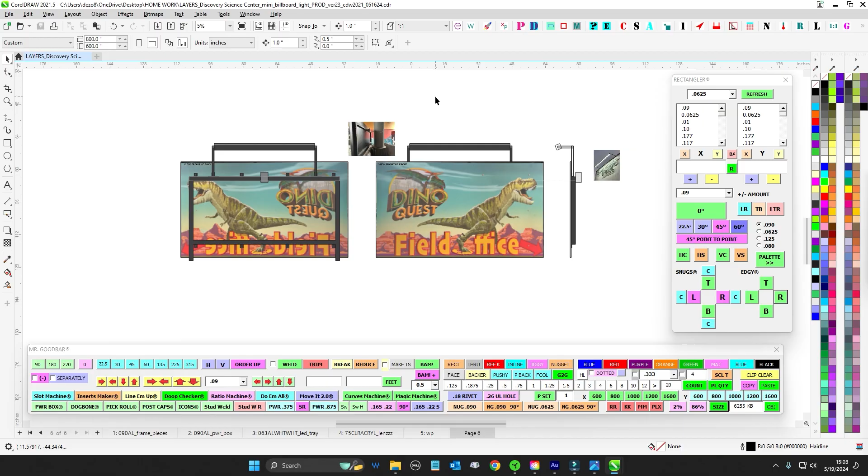Right, got another one here. So this is continuing the Discovery Center Dino Quest. We did the Disco Dino, but they like the light so much that they want us to light up this billboard for them. This billboard's already existing, so I got some pictures here.

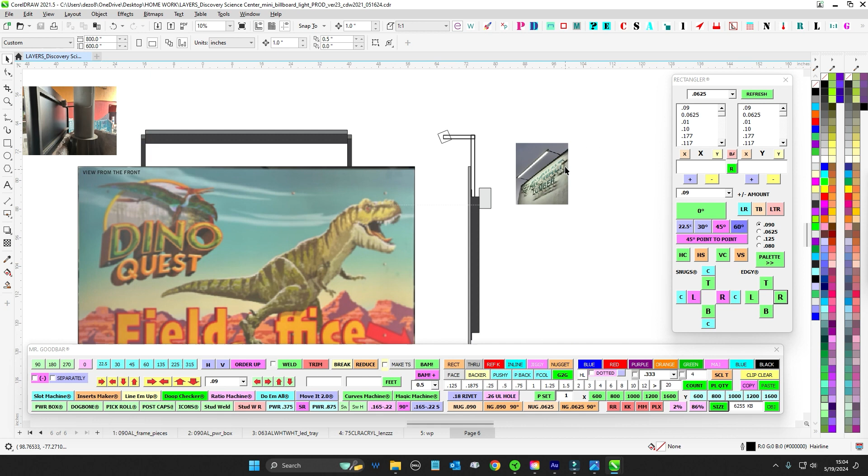So we're just going to be adding this light bar kind of thing. This is sort of the idea, something like that. It's going to come out from behind, so that's going to look like that. So it's going to mount on this bar.

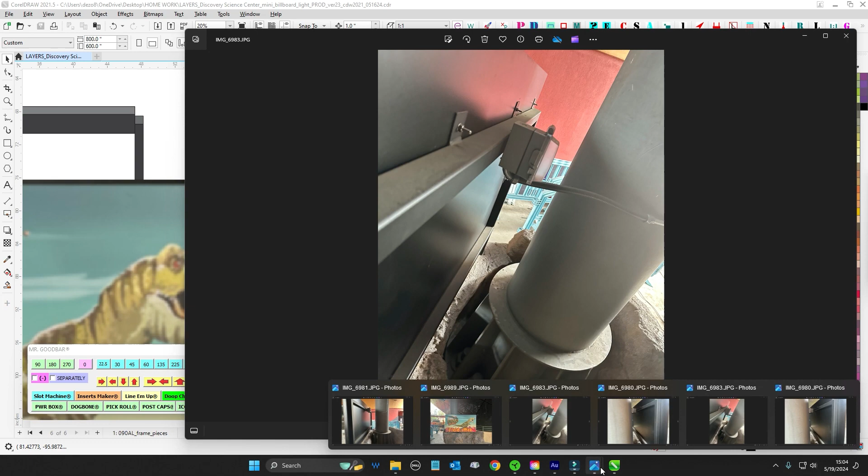This is 2x2 steel, it's got these tabs, so that's all existing. And then it's going to go into this here wet location plug-in socket, so they'll just lift that up and plug in. And then our little unit, the power is actually going to sit right there. So power will sit over here, it's going to mount to this bar and go across, and then it'll be on the other side over here, and that'll be this mount.

But so that looks like this, kind of like this. This view's from the back, so power will be over here.

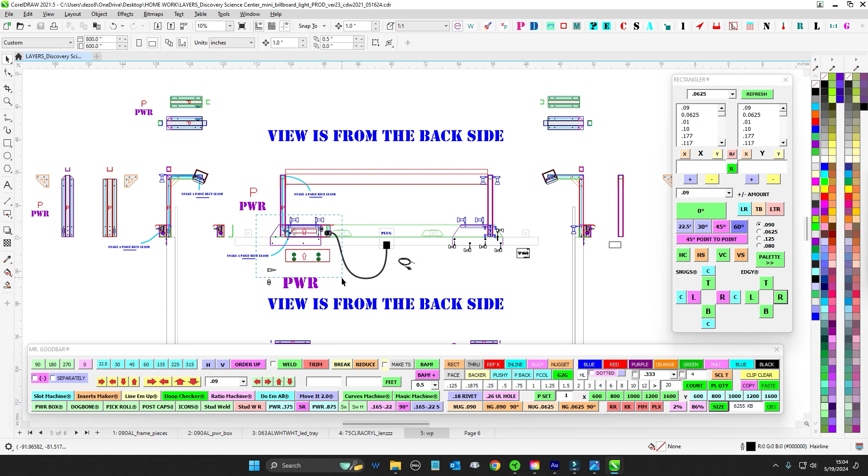We got the light bar right here. This is the existing kind of layout, so you can see those tabs, you can see where the bolts are and stuff like that, and that's where that plug is. So nothing too crazy, but I just want to go over it and show you some things, show you some pitfalls and some challenges. So with that, let's get after it.

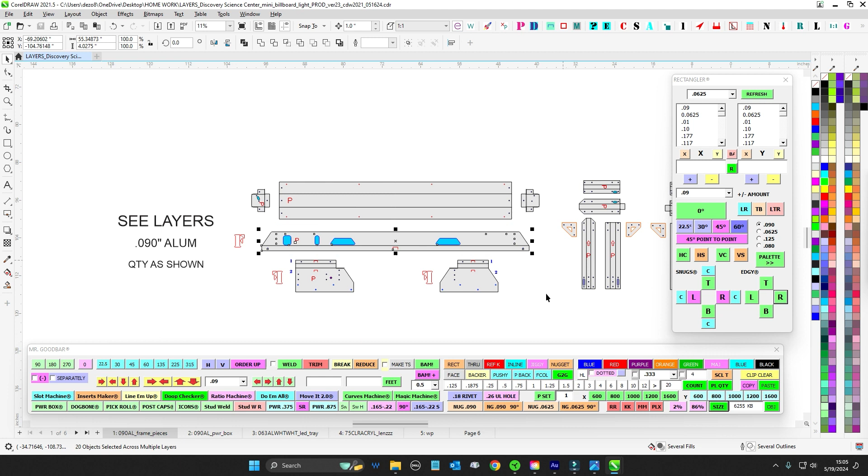Lay of the land: I got the frame pieces, you got the end caps, you got the main light fixture, you got sort of the crossbar on the back to give it strength, and then you got your sort of mount plates there, and then these are the actual light bars.

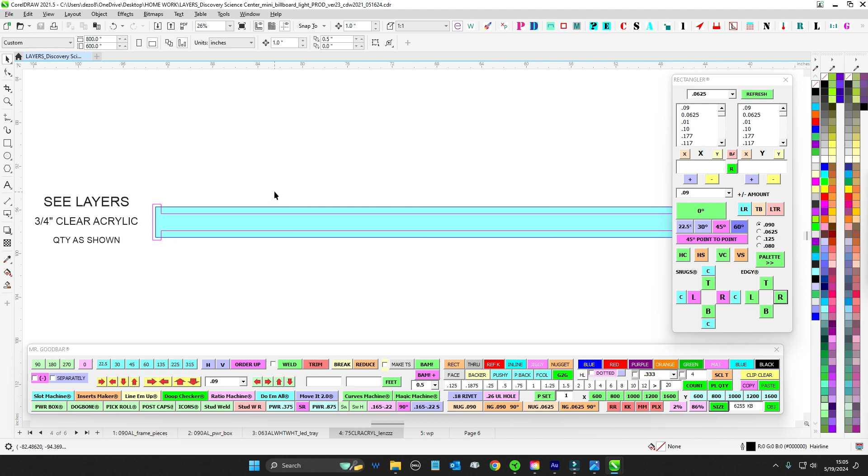So very similar to what you just did, it's just a little bit smaller. And then it's going to be this custom little power box that goes on the back, you're going to rivet together. And then we have just a single little white light tray where you're going to put some LED strips. That's 063 white, and then there's going to be a 3/4 inch clear lens with a 3/8 groove. It's going to hog all this out here, nice island fill, and then that's where the channel will be for the LEDs.

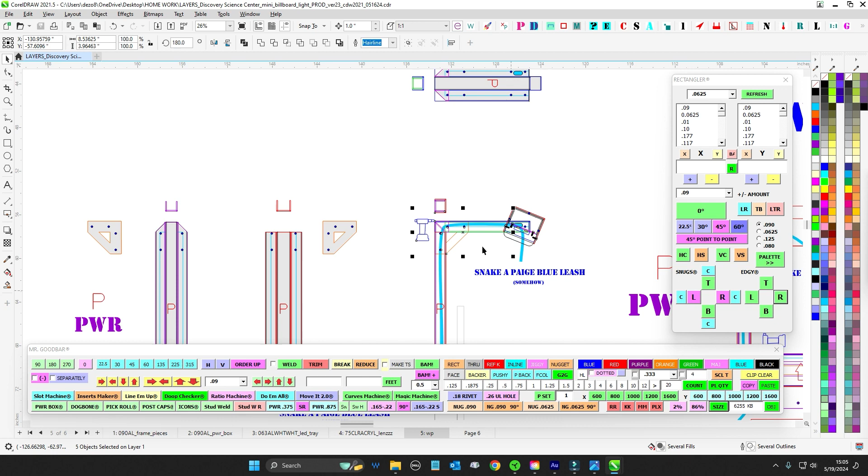So again, it's nothing crazy, you just kind of did this, this should look very familiar to you. So you're going to get these, slide this inside here, slide that inside there, and then use these guys to rivet that together. And then you're going to have two L's.

You're going to have the power side and you're going to have the non-power side. So non-power side has nothing on it, there's no holes or anything. Obviously everything that's power is going to have a P on it, and the P, because I have the power, is all going to be everything on this side.

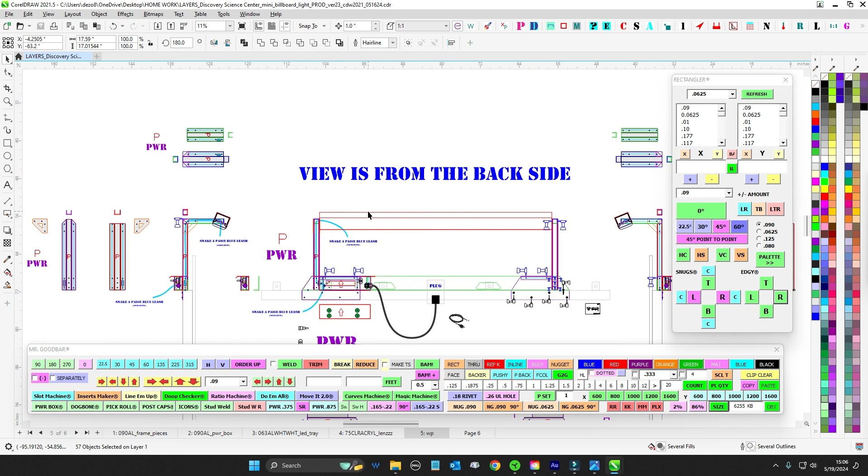So if you're looking at it from the back side, which is this side here, the back side - where's the good shot, that one there - so from this side power, this technically is the left if we're standing back here in the rock. But it's kind of tough for the left and the right, I could have done port, but port was P, so whatever.

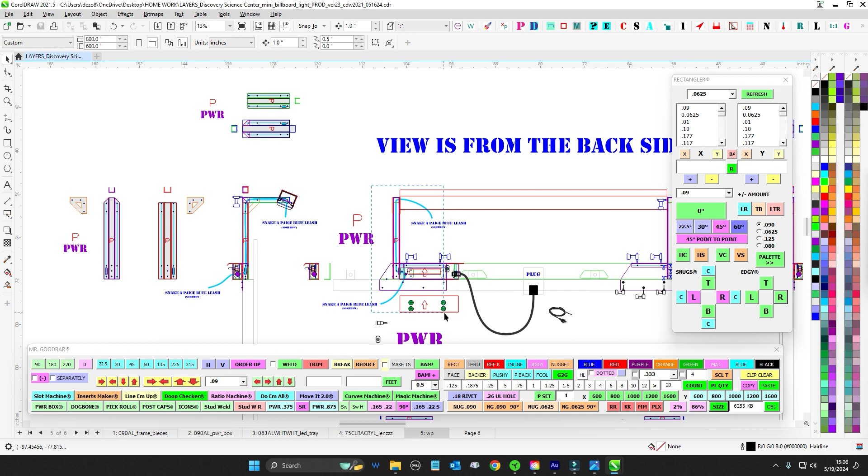So as you're looking at it, everything's on this side, so P's power. This guy here, you're going to flip this over, this is actually upside down. You're going to flip this back this way, and then that plate will kind of be showing this way.

So anyway, everything, there's no welding, there's no welds, it's all riveted together. So you're going to go ahead and rivet together your L's, get those brackets made, get this L put together, good to go.

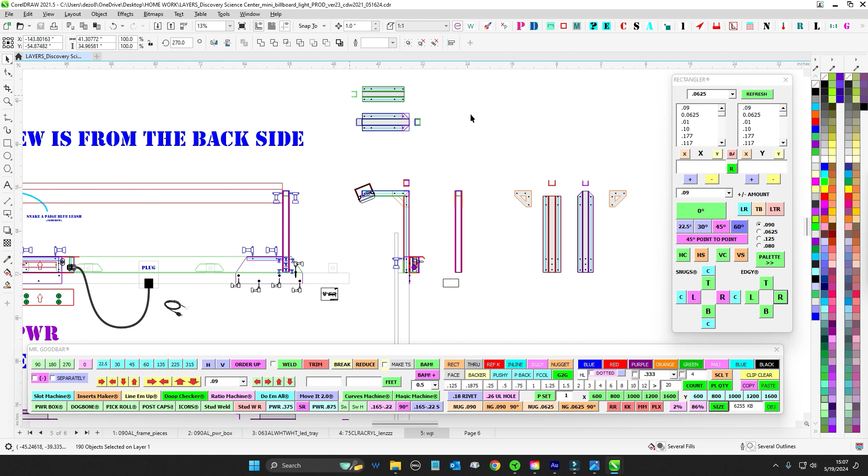Then you're going to go ahead and take these plates here, and you're going to kind of sandwich - this is like this little 1-2 bend. This flange here goes up against this green plate, so if you look at it from the side, you can see where the green plate is in the front sort of, and it faces forward.

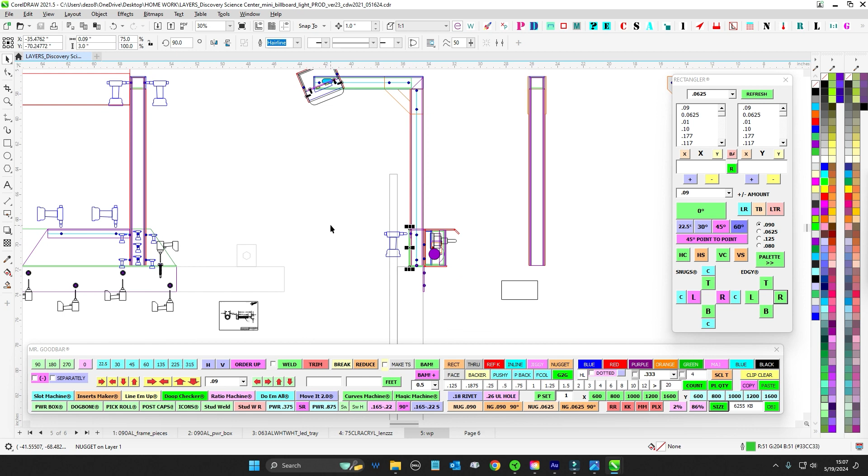The green plate faces forward and then tucks under, closing off the tube. So you slide that down, and then the purple guy here goes this way, and then back. And then that's the mounting plate that goes all the way down.

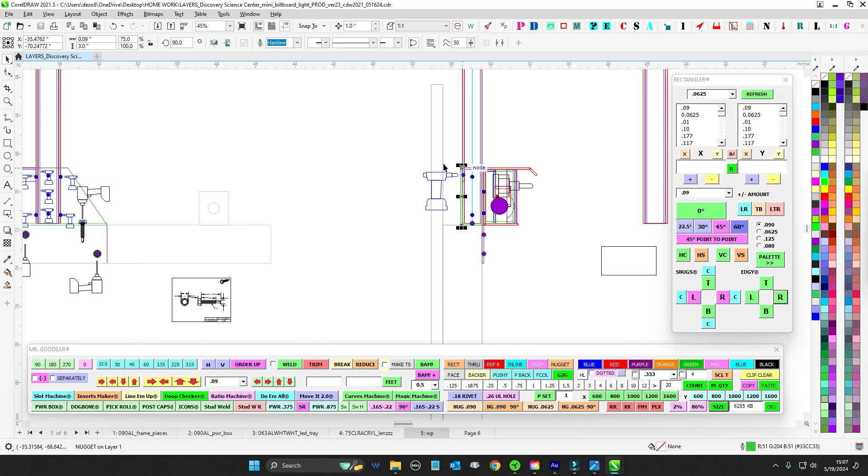So that's like here, that's the mounting plate. But then this part curves up, and you're going to hit that with rivets from the front. And then these here will coincide with these right here.

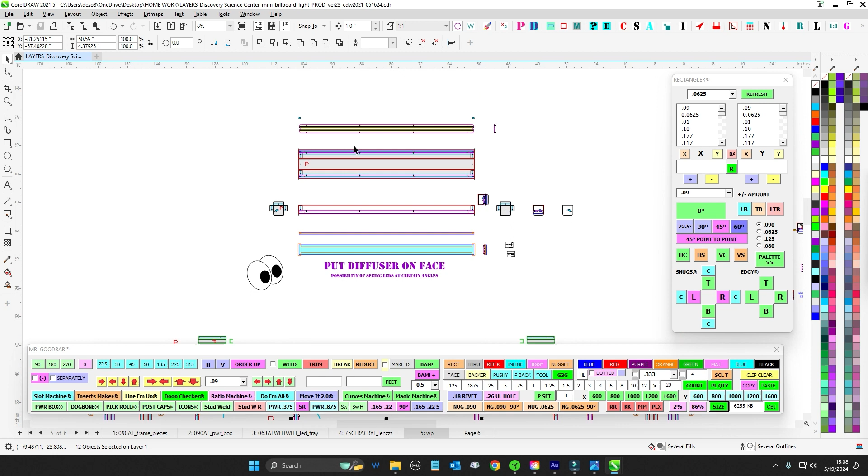So this is your main strength plate that runs across. Originally Jim had this figured out with these two legs, but torsionally, this is 4 feet across and it'll be twisty and bendy because it's just an 090 box. So I went ahead and put the brace along the backside too, so that way this is a nice unit, just a little piece across like that.

So these plates here, you do a 1-2 bend, and then they actually rivet to the front. They're going to rivet 3 rivets here into the L's, right here and here. And then on the front side, you also get these 3 rivet holes here that go into the L's, into the legs. So front and back, that'll create one big sandwich.

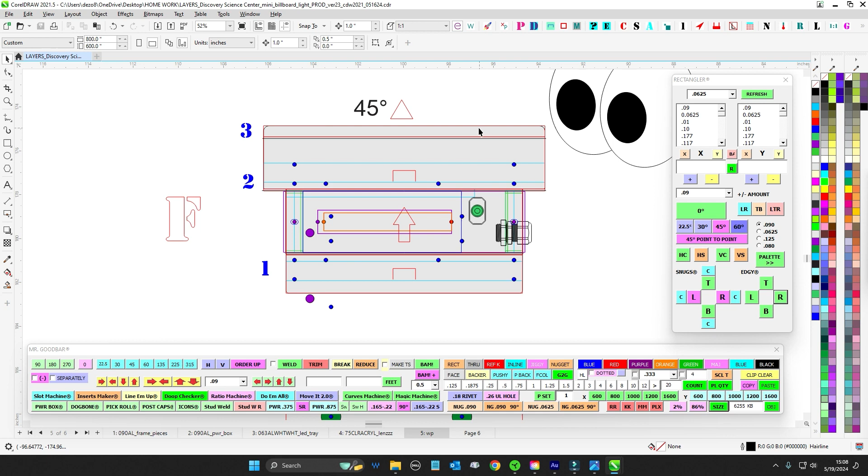So that's how that'll all work. Go ahead and rivet together the power box. The power box is a 1, 2, 3 bend. You're going to bend this, bend this, and then last you're just going to put a 45 lip. There wasn't enough room to put the angle bend there, but you're not going to do full 90 on that, just give it enough so any water spills off.

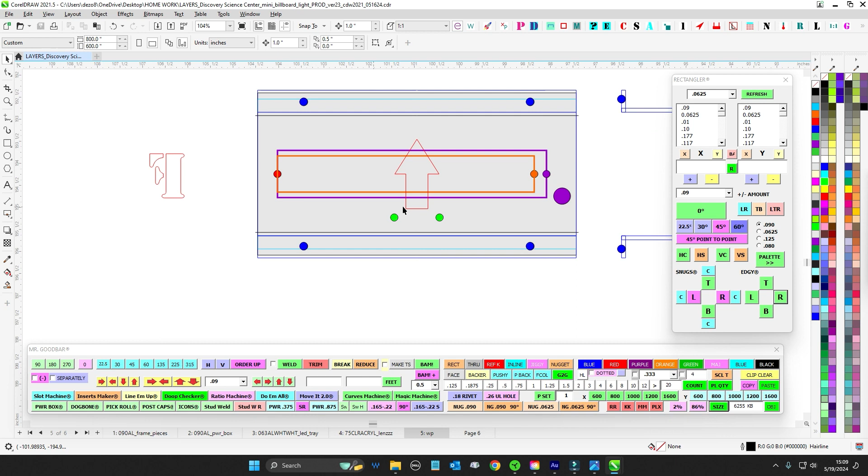And then you have an inside tray where we're going to do keystone, either 24 or 12, whatever you're working with as far as light tape goes. I left that for you, but it's going to be, and you got 2 points here for ground. It's going to be a tight fit.

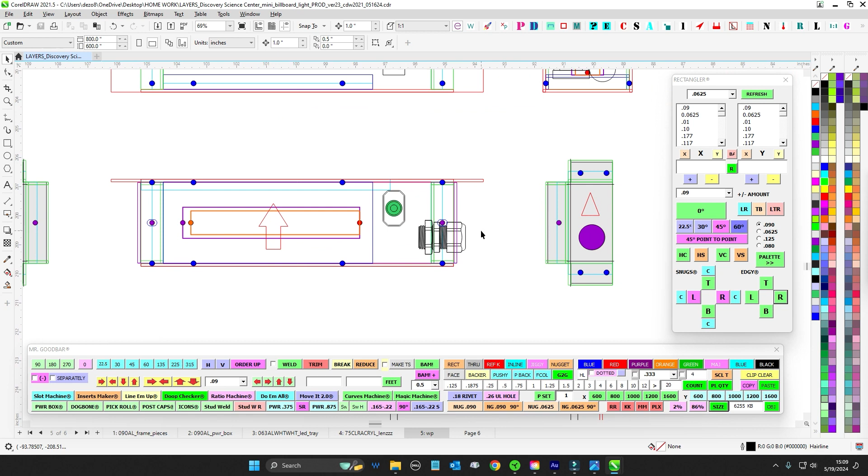And then the switch is going to mount to the door. It's going to poke through and you're going to mount it there. Then this is going to flip around and just mount, like we do. It'll have that there and that there. These guys go flanges out like we do. And then this side will be for a liquid tight connector for cord.

So because this is going to mount and just plug and play, essentially, lift this up. This is a watertight, or wet location, and then the cord's going to come out and run along. I believe Jim said he's going to install this, so we need to make sure it's plug and play, literally.

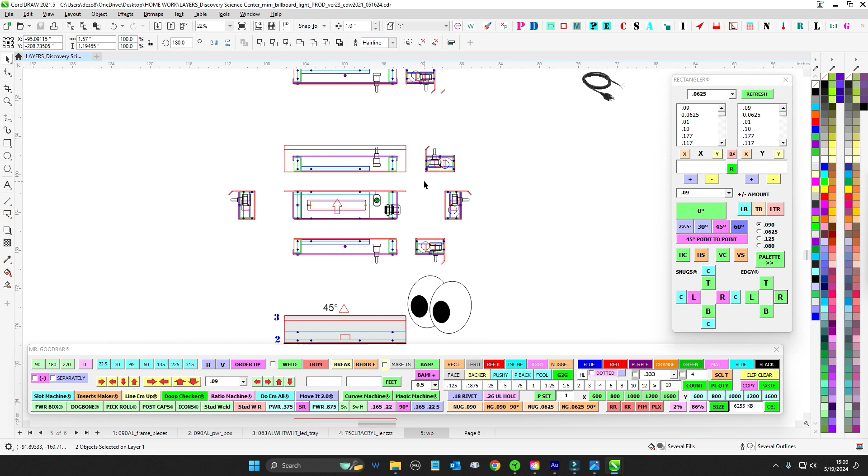So I did order up, I didn't know if you had any plugs, so I ordered up a couple of these from McMaster. These are wet location, I think these are SJO, whatever they are. So you're going to take, and this is coming from McMaster as well, so you're just going to get that in there, do this, get it grounded up nice.

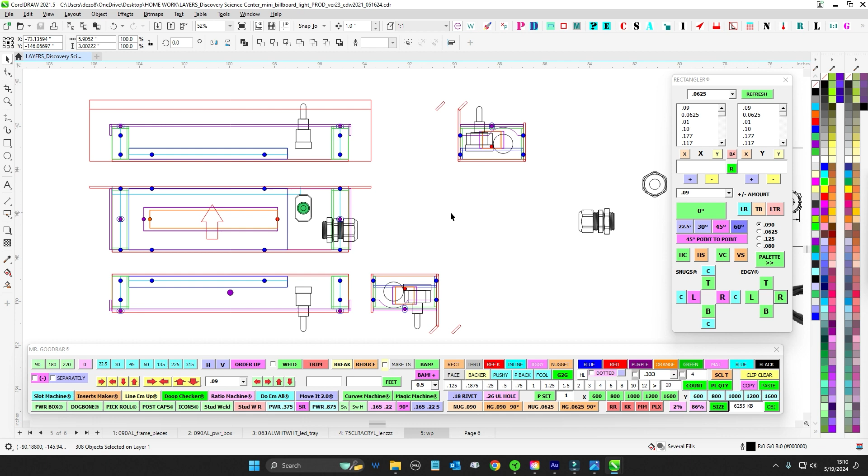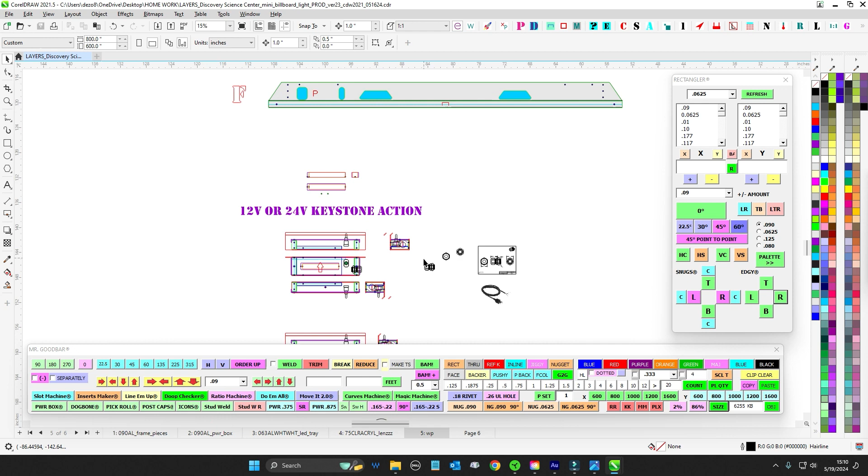And then Jim said that these guys do sort of dot their I's and cross their T's, so they're going to want to do probably UL. So we do want to do like an electric sign label, but if we do a cord connected sign, everybody playing along at home, I believe it's 20 pound for 1 minute. So you're going to want to do a test to make sure strain relief is good to go with this guy, but also this is wet location, so that should be good. And it should do watershed okay with the switch and everything. So anyway, that's that.

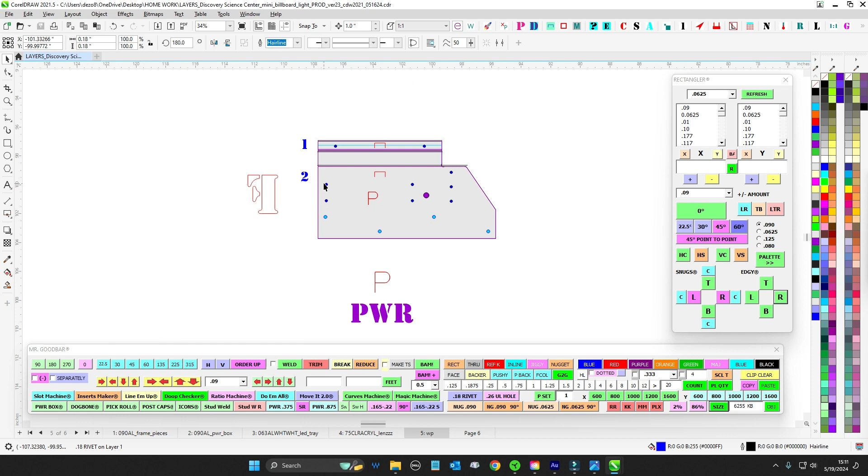So get this built and then go ahead and get these guys riveted together with the L's, but don't do the tray yet. So you can do this part, do the back part, and then you're going to use these access holes from the front to get to these rivet holes here to be able to rivet this whole assembly onto the plate.

So these holes here will be what you use to put this whole system onto the backside plate here. And you can see right here, these are the corresponding access holes to get to those with your rivet gun, through here and here.

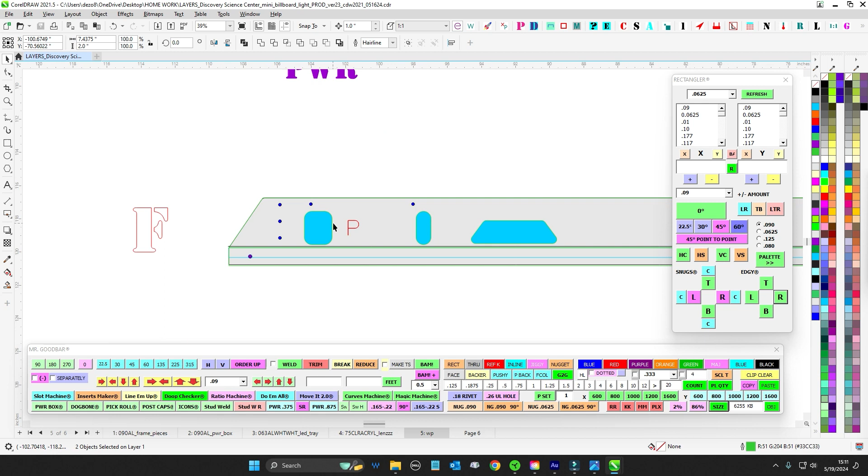So it's a little bit of a threading the needle thing, but when you're done, this should be riveted to the backside of that purple plate, and it should go right along with the curve, the top part there, with the rivet there, this little guy here. So it should be even, it should look pretty sexy. A little box poking out.

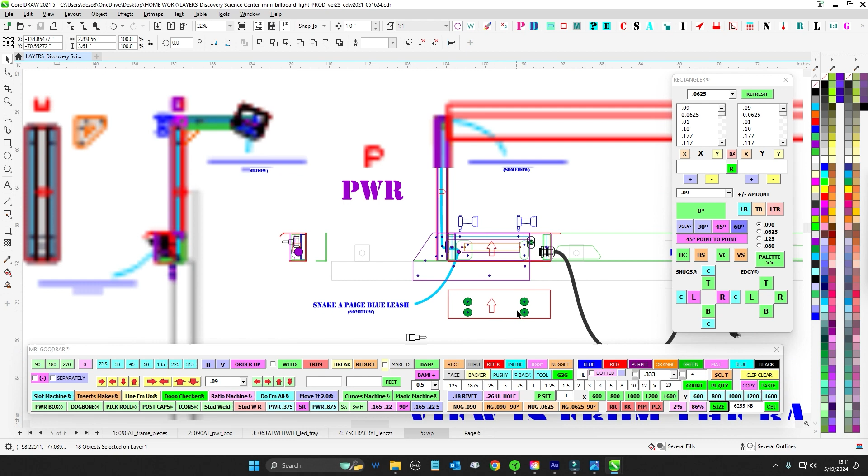Here's your switch, and then this is going to run along to the plug there. So I think you guys get the idea.

4 shots here, 1, 2, 3, 4 self tapper, 1, 2, 3, 4 self tapper. And then I have holes here in the green guy right there. If you want to run, if Jim wants to run a couple verticals just to make sure it's nailed down, they have provision there.

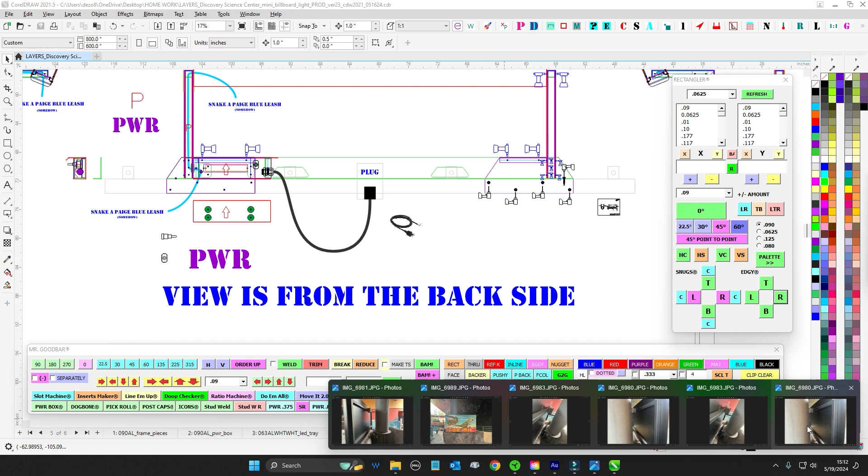So that's kind of where, now that you see what's up, this plate should be right about here. 4 screws, frap, frap, frap, frap. And then it should be 4 screws here, frap, frap, frap.

So now these bolts might come into play. I think they stick out about 1 inch, so hopefully I went ahead and made clearance for those.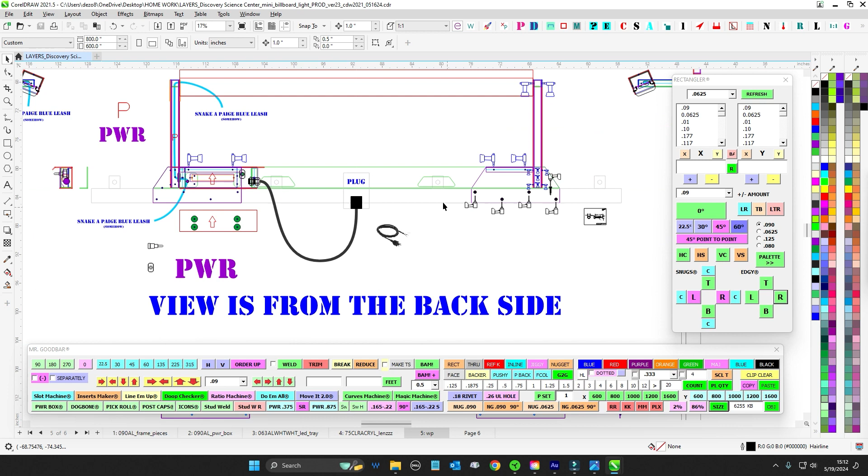They should be right there per Jim's measurements, so that should give us a little bit. It's a nice little detail, looks cool visually, but that should allow if those bolts need to poke through.

Because again, I don't know if Jim's going to have the ability to chop those off, but this whole thing's just over 1 inch. It's 1 inch and 09, so it should still fit in there.

So this is all no fly zone. Hopefully there's no conflict there as it sits on the 2x. So hopefully that works for him.

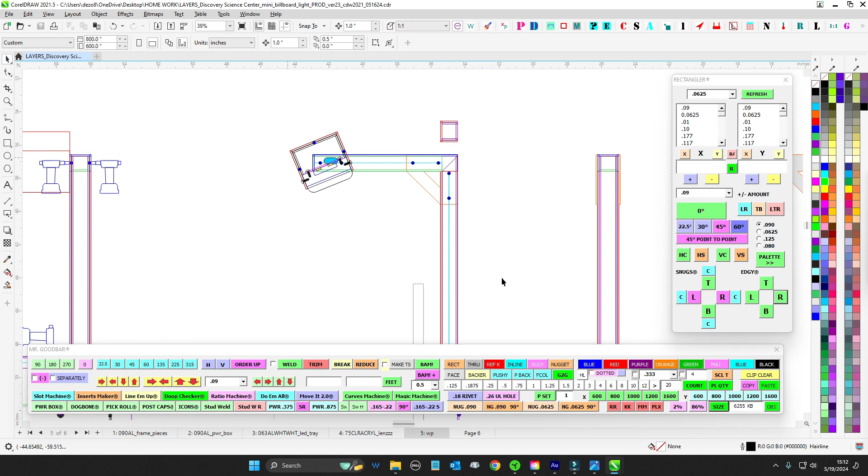So go ahead and get this guy built, get that riveted to the purple, get that riveted together, put the crossbar, get these L's good to go, get everything riveted, but do not do the box yet. So now you can set that aside because I think that whole thing's good to go.

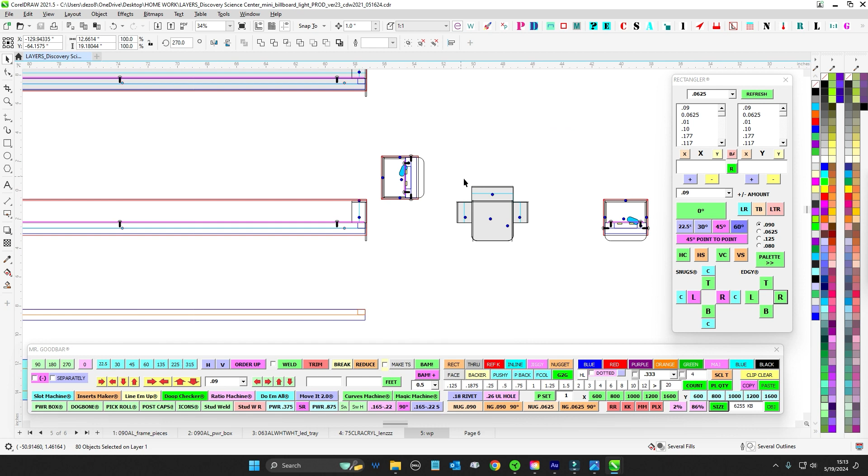Now you're going to bend this up, 1, 2, 1, 2, good to go. And then you're going to do 1, 2, and 2 on the ends. And then the power one has the hole through for a leash. So put the power on the power side, and then you're good to go there.

Now, before you assemble this to the box, you're going to rivet it together, but do not assemble that yet. Let's go ahead and mount the acrylic while it's loose.

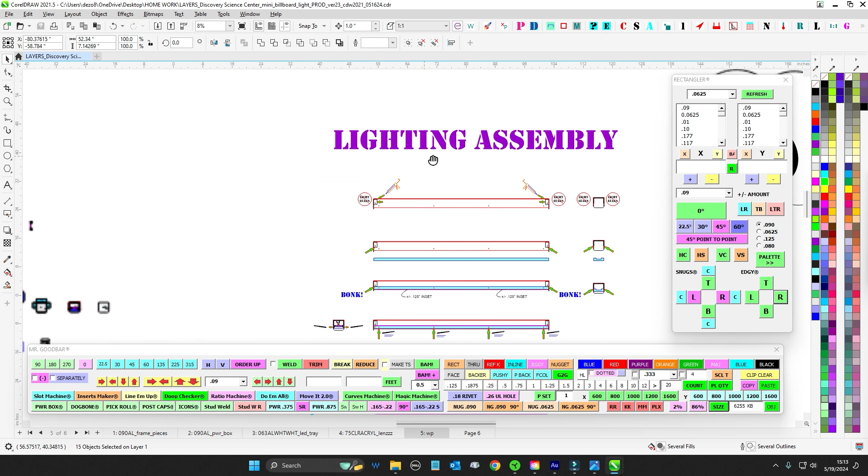So while it's loose, this is the lighting assembly right here. So you've got these riveted in, the caps. Then go ahead and put a little bit of caulk, because we don't want a light leak on the seam over here. So caulk that up pretty, okay.

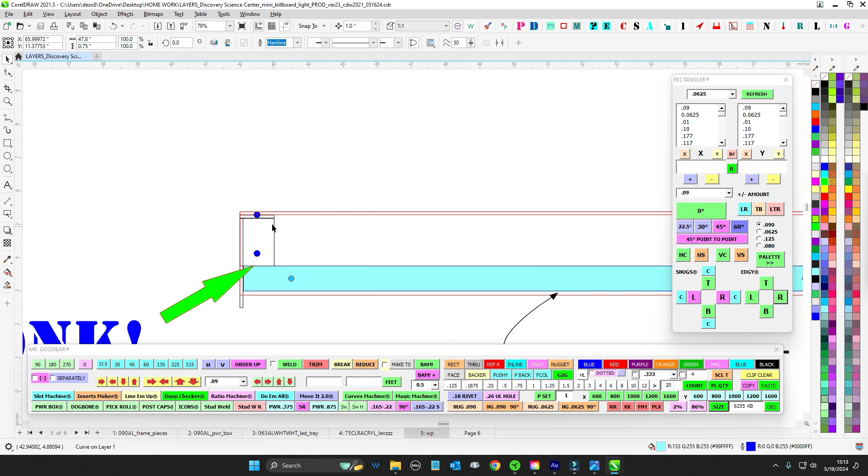But keep this clean, because this now is going to become a landing shelf for your acrylic when you slide it in. So don't get any caulk on that ledge, but try to make sure there's no light leaks coming through here. I'm not sure, because this is all going to get painted.

Hopefully they throw some Bondo on those seams on the side. That would be great, but we'll see.

Anyway, so take your acrylic with nothing on it, and then go ahead and put it in. Make sure that the 3/8 trough for LEDs are facing into the cabinet, into the box.

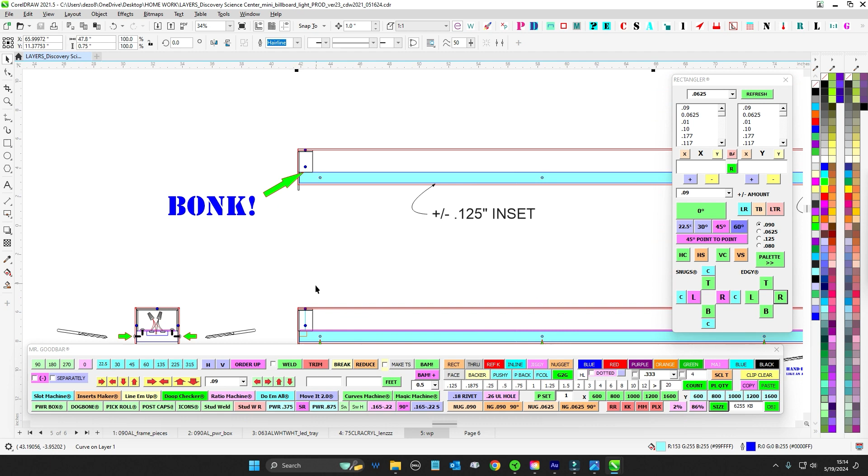And then when you do that and it bonks, because this is metric, you know who I'm talking to. This isn't 3/4, obviously. This is going to be 0.71. So this isn't going to be exact, but it should be about an 1/8 inset.

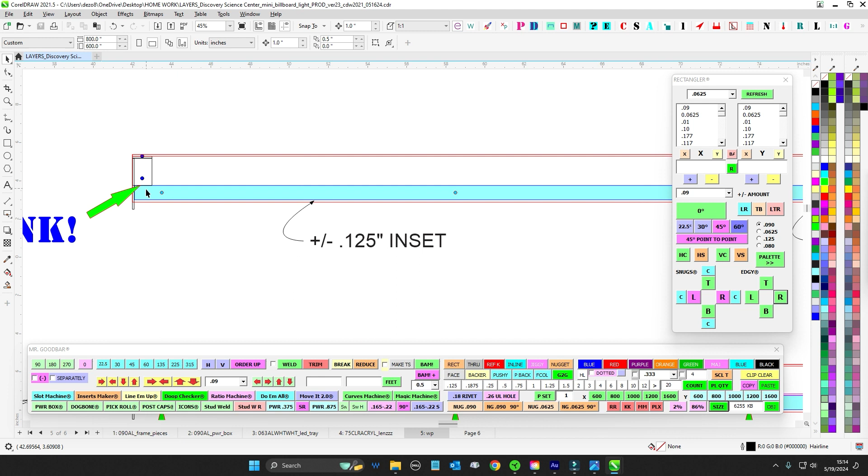So let this bonk, and then whatever you have, just make sure it's not sagging or dipping. And then you're just going to line it all up, and then by hand you're going to drill the holes. So make little marks for yourself, get them started, dimple, and then you can pull it out and drill better.

We're going to use those screws that we like to use. I brought them in. So you're going to have the cord, you're going to have these screws, and you're going to have the strain relief from McMaster. So look for that probably on Tuesday.

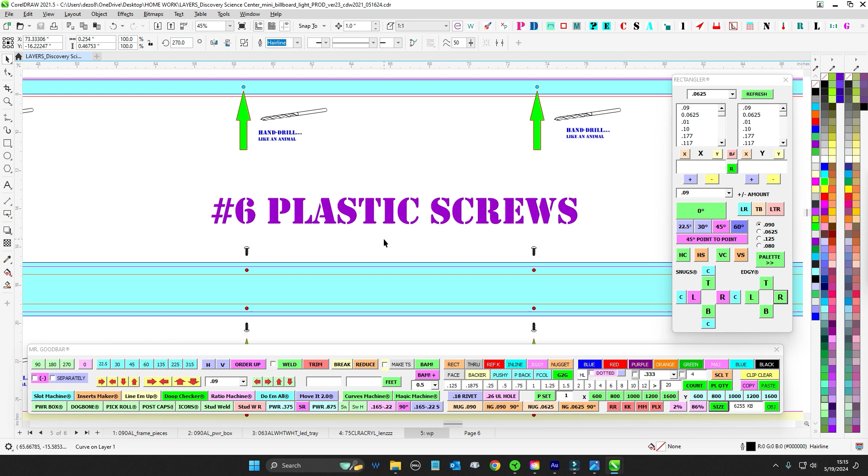So you're going to have the number 6 screws. I think you guys run a 7/64, maybe an 1/8 inch, I don't know what you guys use for number 6, I forget. So you're going to do 4 on one side, 4 on the other. That's going to handle the mounting of the acrylic into that guy.

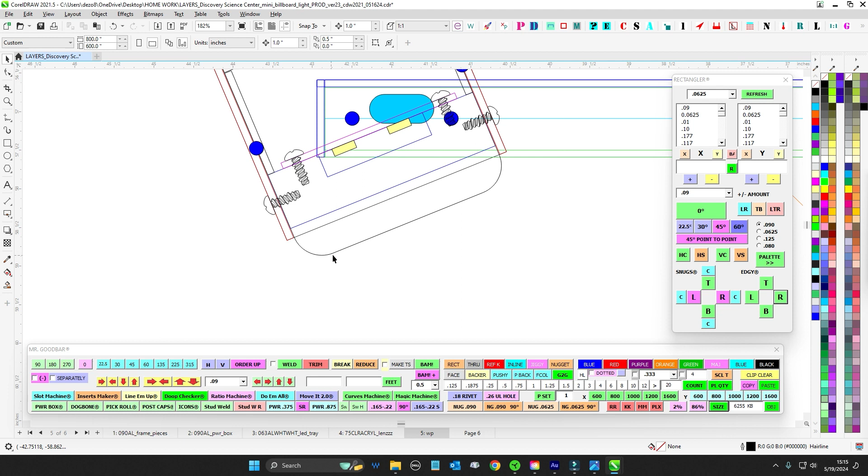So it'll look like that, with a little bit of lip looking good along the sides. And then I went ahead and made this thing stick out at the ends, so there's a chance it could help if somebody bonks their head. You can see this gives a little bit of round rather than somebody hitting a square corner.

There shouldn't be any reason for anyone to be standing this close to it, but if somebody for some reason wants to walk up, their head could be right about here. So we want to make sure — that's why you have these 2 guys sticking out at the ends, to try to help deflect any bonk.

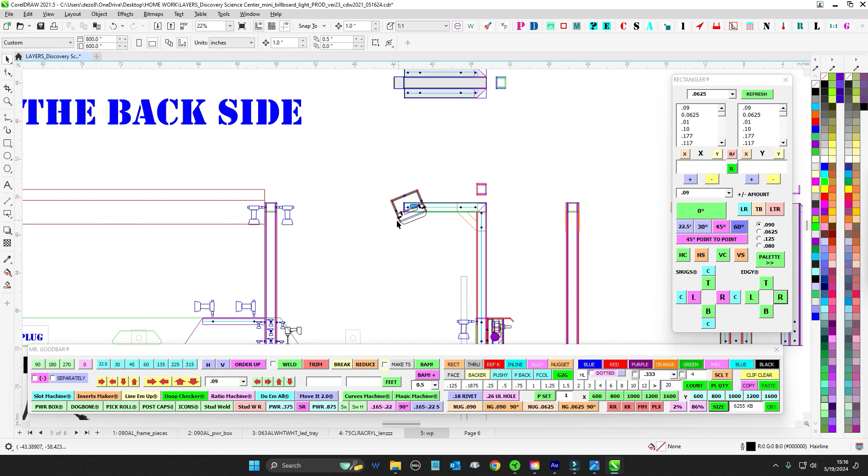But that's kind of how that's going to look. So get this mounted up, get these drilled, ready to go. And then you're going to take your lens, before you put any LEDs on there, and just lay it onto the top where the trough side is up, like right here. And that's how you're going to drill these.

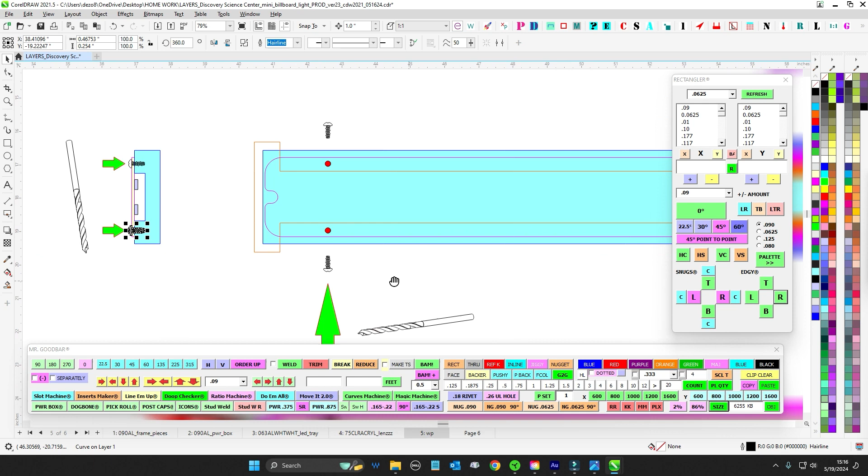Same screws, same method — lay it out there, get it centered this way. You can see where it's almost to the ends there. So go ahead and get this guy lined up, and then get your holes drilled for those. Obviously don't go all the way through, just long enough, whatever you need. So number 6 is to hold the LEDs, and number 6 is to hold the lens in place.

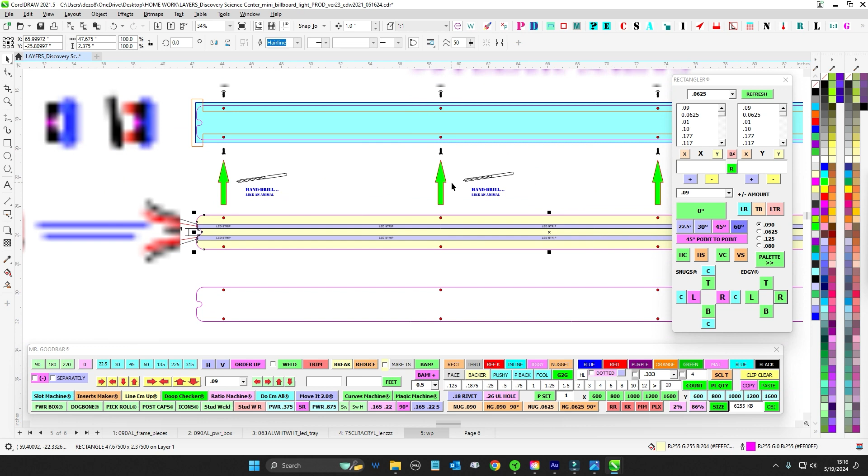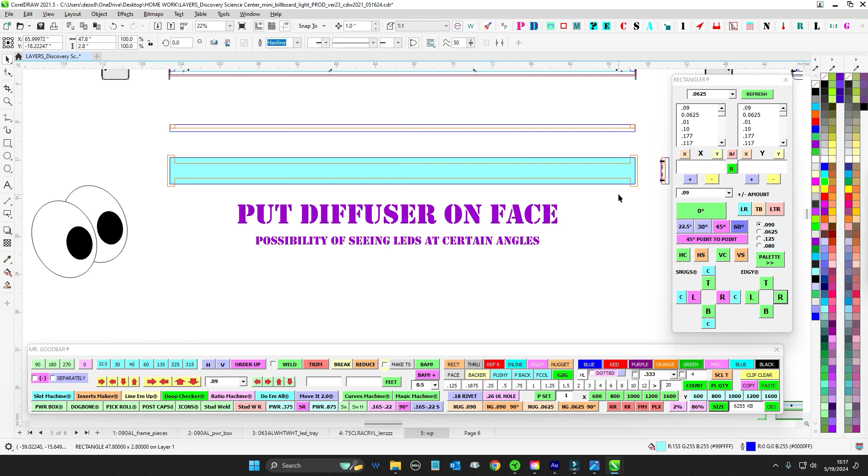So once you're done with that and have this already fitted and drilled, you're going to go to first shot. Because Jim says there's a chance when people are coming up a stairway somewhere, they might be underneath and catch an angle and get blinded by some LEDs. So let's make sure we put some diffuser on the face, and then we're done. But get it fitted and everything first, and then give it to first shot.

And for LEDs, we wanted to use a linear strip — let's not do Bendlux, we'll save that for other things, but we want to do a linear strip. Just for layout purposes I use the flex tape, the Sloan flex tape, just 0.3. It doesn't have to be perfect, but I have it basically a 1/2 inch apart. So if you eyeball there, this is 0.3, this would be Sloan flex tape. Do 2 strips down the middle, and then give yourself leads at the end.

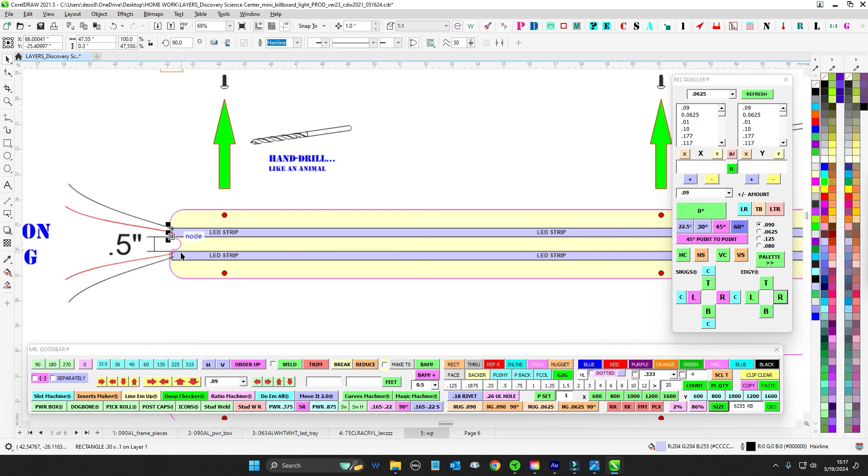Now I don't know if it actually fits, might be a little short. That'll probably be okay if it's a little short — I just went ahead and made it like that. But even if it's a little short, whatever, should be fine. But give yourself just some fresh little leads out, and then you're going to be making your connection inside the housing.

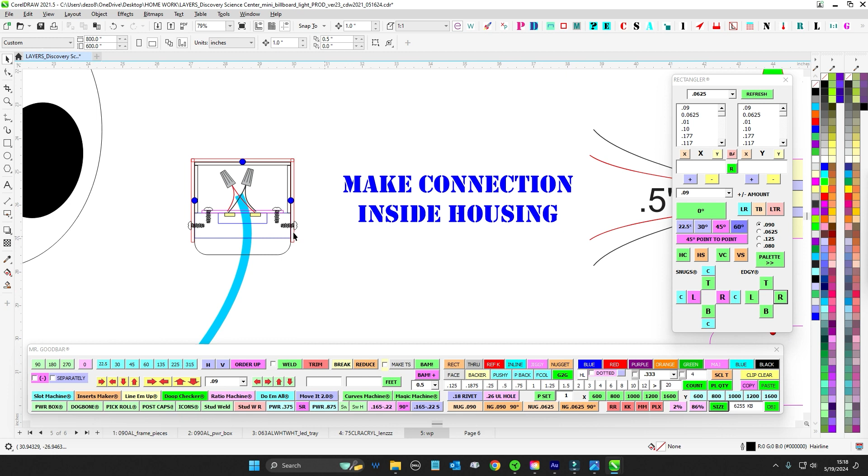So the whole idea is that once you get the LEDs and this thing's ready to fire up, this will actually be sort of like a cartridge — the LEDs will be on the back firing into it, so this whole thing will light by itself before it's even mounted. Then you're going to make a pigtail lead into this area, use these little connectors, make your connection, stuff it up in, and then nail it down with your side screws, and then we're good to go.

So that'll blast out. This actual housing, the metal part - I was going to stick the LEDs up here, but the way this is working out, this actually becomes the actual light cartridge. So this just becomes a holder. The whole thing is just a holder.

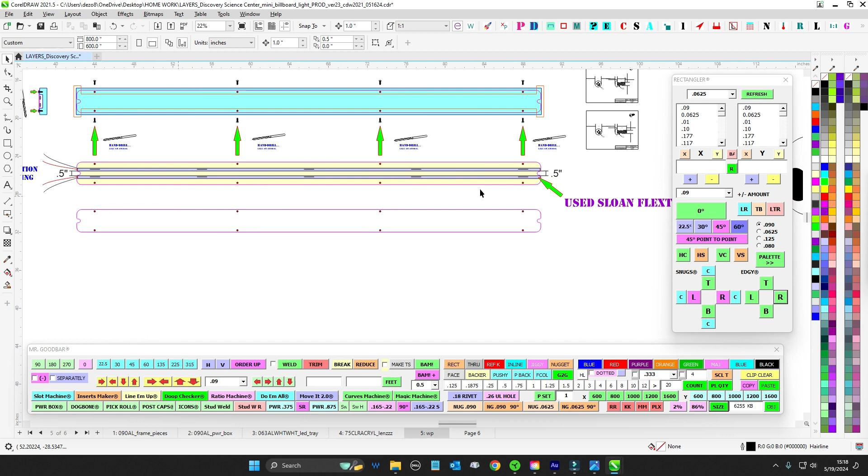So you'll get that handled, a little bit about a half inch in between, just make it look like that. As long as it sits in the trough, there's room. So that'll be your final assembly when it comes time.

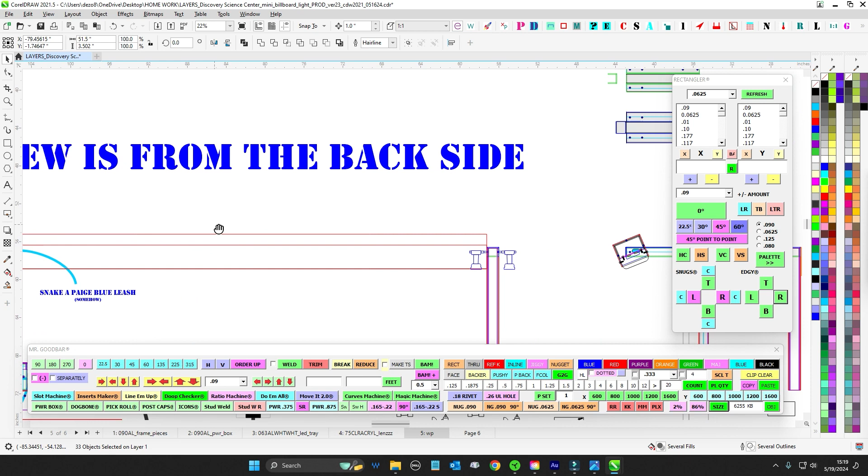So once you have this mounted and everything's taken care of, go ahead and rivet the box into the arms. That'll be the last thing you do. Just tuck it up in, make sure power's over there, and then that should line up the hole there into the hole in the L.

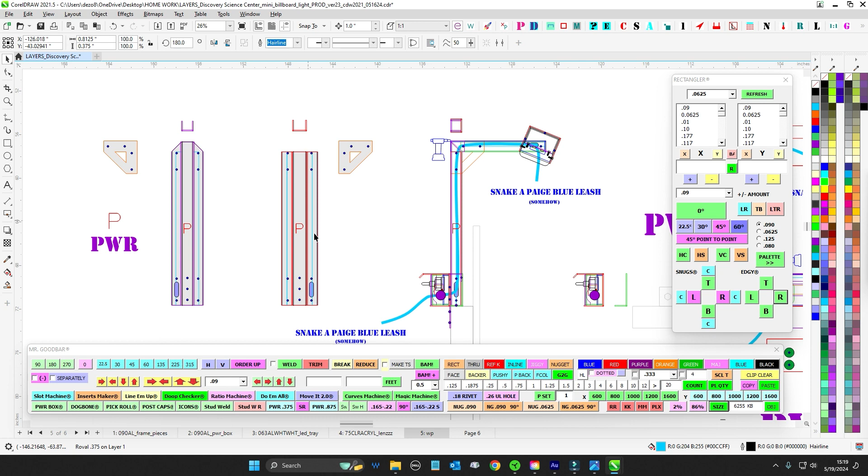This might not be too fun, but you get yourself some fish tape, and then you're just going to feed it through. Because these were so small, I didn't have the ability to add little doors and things like I was able to with the other Dino one. So access is not going to be fun, but I think you guys can get it done.

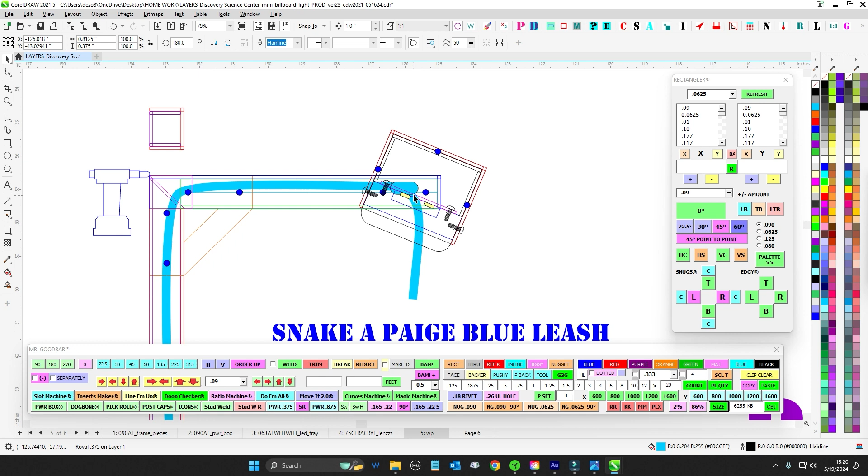You might be able to stuff the fish tape and power it through this. If not, what I like to do is take a little bit of layout string, like install concrete string, put a bunch in there, and then use your air nozzle and blast air through - it usually will power the string through. Then you can tie the string to the wire and pull it through, but it's not going to be fun.

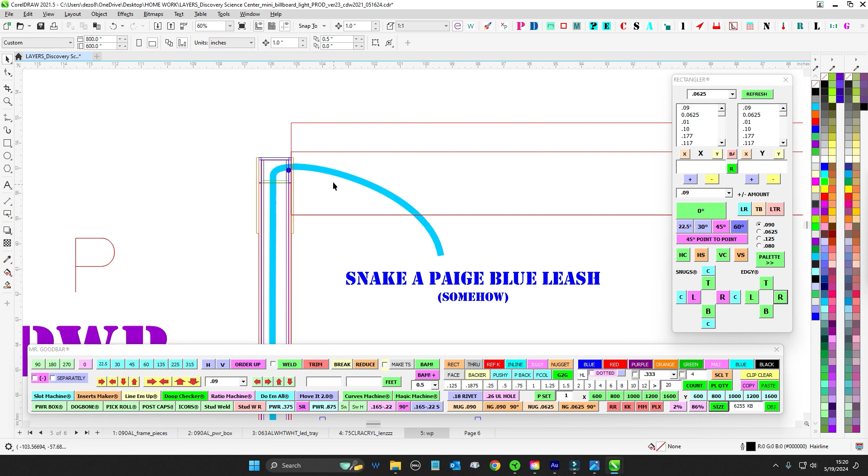Also, I suggest you do this before you actually rivet this on, because that way you can actually get in there and do that. And then you might have to push this out of the way, put this in there, and then kind of pull it back through. You'll figure it out, but it's not going to be fun. That's a heads up, and I apologize, but there's not much you can do about it.

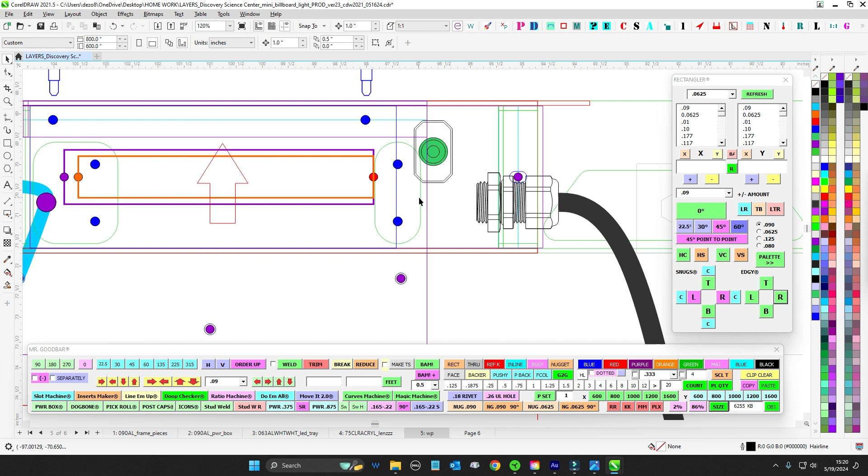And then bring the wire out. It goes through this hole here and will poke into the area here, so then you can make your connection. And then your switch lives a little bit above, and you can bring this through - it'll be tight in here, but I think you guys can make it work. And then there's your plug.

So again, Jim has fantasies of him going over and doing this himself. I would suggest giving him the self-tappers he needs - these are just gonna be like number 10, make sure they can drill through that steel. And then also give him the squares that we do with the zip ties.

That way he can secure that cable, and maybe some zip ties that are longer. And if the cable's too long or something, he can kind of bunch it so it looks nice, so it works its way over. We definitely don't want to have it like I have it here - I doubt they'll like that.

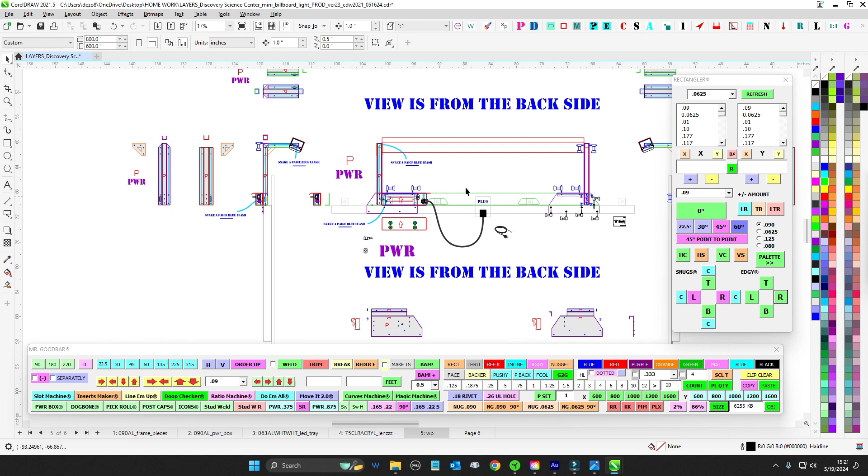He says these people are kind of on the ball, so let's make sure we do a UL label. But as usual, we're up against it - I think Jim wants to install this on Thursday. I think they have a grand opening as always, but this also needs to be faux finished.

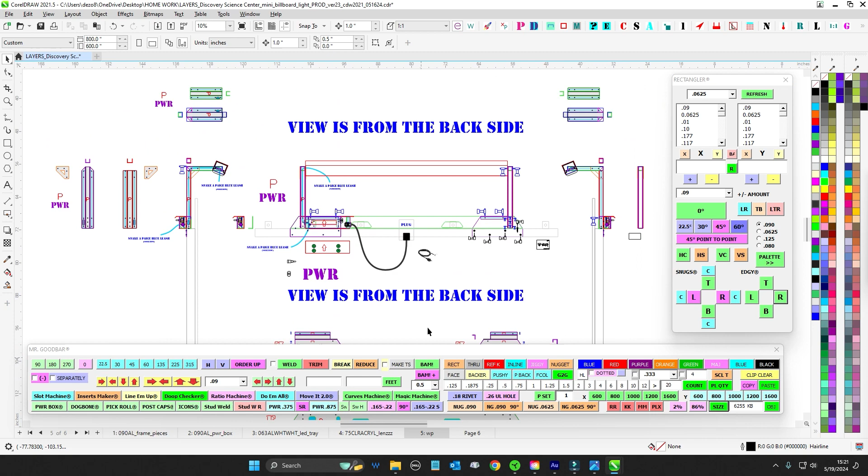So that's why I'm kind of doing this on Sunday. Let's get this powered through as fast as possible, get it to paint as fast as possible, and get all this taken care of so it's off your radar. But anyway, I think that's it - I think you guys get the idea. So that's it. If you have any questions, hit me up.